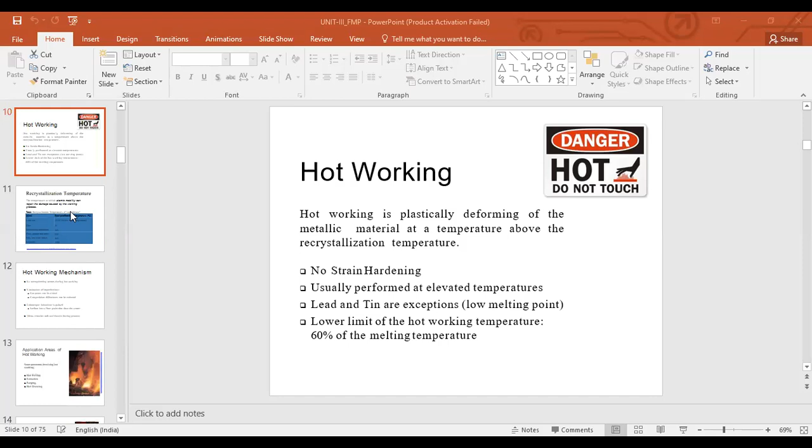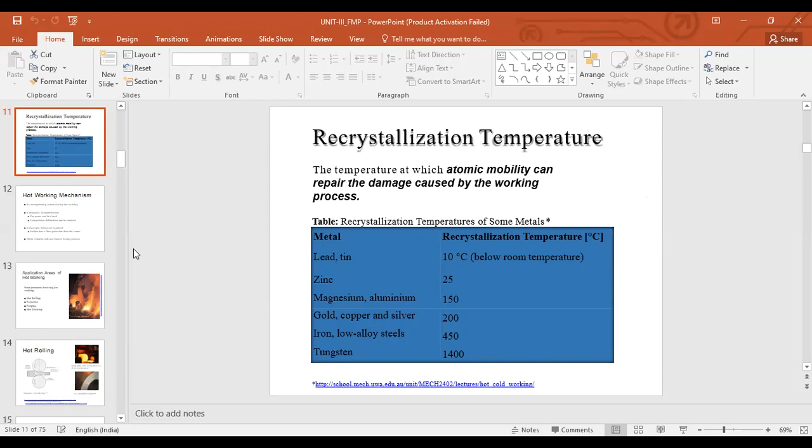And then the different recrystallization temperatures for different metals, tungsten being the highest because it is quite strong, having much strength, and offers more resistance when subjected to loads, and it is quite dense. One reason could be seen as density.

So as you can see, hot working, we looked at that there is no strengthening occurring during hot working because of higher temperature. Elimination of imperfections, gas pores can be closed. So if the temperature is quite high, then there is rearrangement of atoms. So gas pores can be closed, composition differences can be reduced, and even because of the mechanical loads, these gas pores can be closed, because of application of external load.

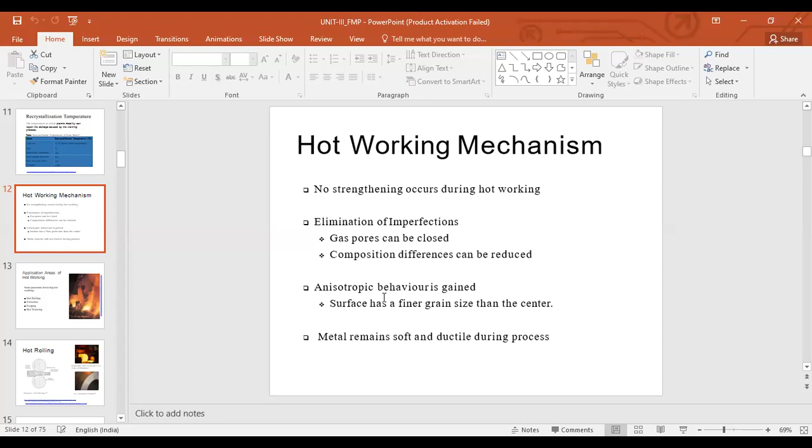Anisotropic behavior is gained because if you are, for example, undergoing hot drawing - depends on the different application areas, hot rolling, extrusion, forging, hot drawing. As for example hot drawing or forging, the grain structure would be changed, even for extrusion and hot rolling as well. So anisotropic in the sense you have elongated grains, the properties would be differing in different directions. That's what anisotropy is. The surface has a fine grain size and the center has a coarse grain size. So that's anisotropic behavior. The metal remains soft and ductile during the process.

So now I want you to have a look at some video, so that...

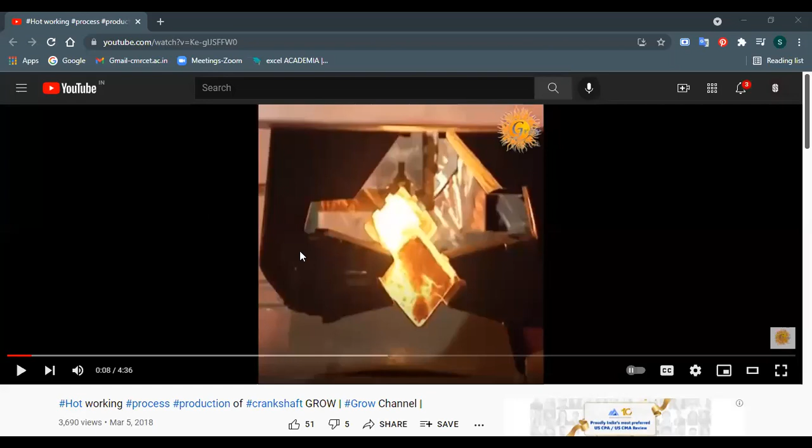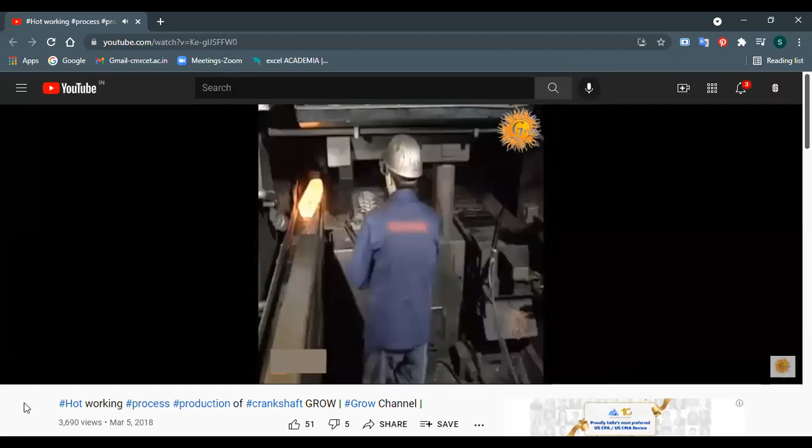This is the process of hot working. There are two kinds of working - one is hot working and second is cold working. You see, they are being pressed while being red hot - that's your recrystallization temperature being achieved.

You separately increase the temperature of this material in a different furnace, etc., and then you bring it to the die. So these dies also have to be resistant - they should be able to bear the temperature that we are working in, and should be able to avoid wear and tear. There should be less wear and tear because they have to be used for long. So all those are kept in mind, keeping the temperature of this metallic material in mind.

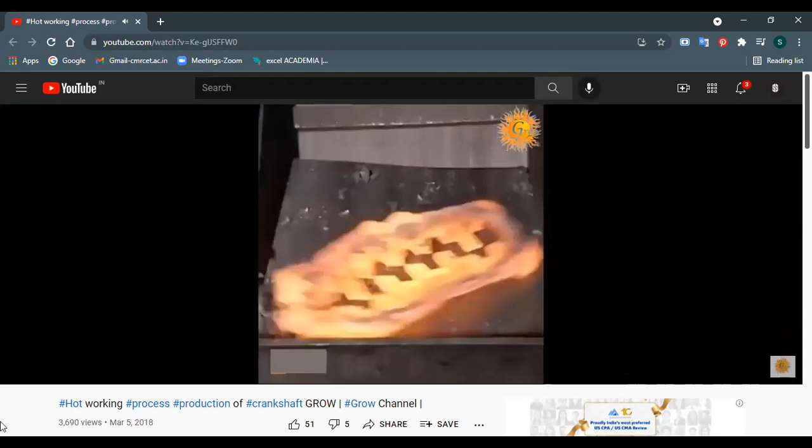The dies would be designed, etc. So this is hot working, right? This is the state that we are working on with the material. The process of the hot working, and in this video you are watching the process of

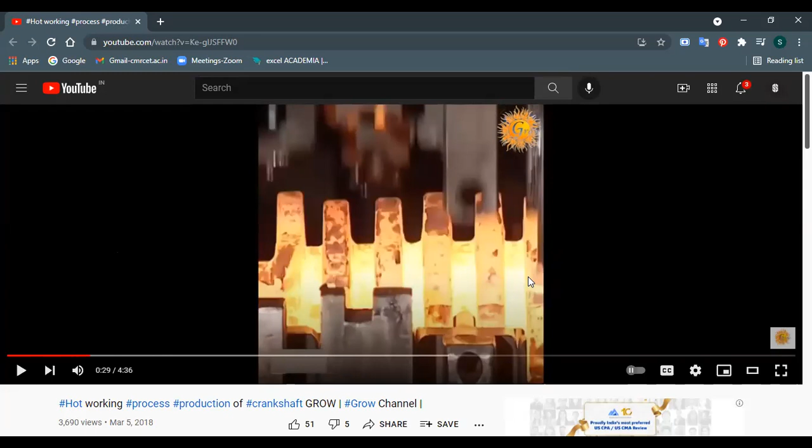That's a crankshaft. If you have observed in automotives, either a two-wheeler or a four-wheeler, you would observe this crankshaft in the engine case. So that's done using this forging method.

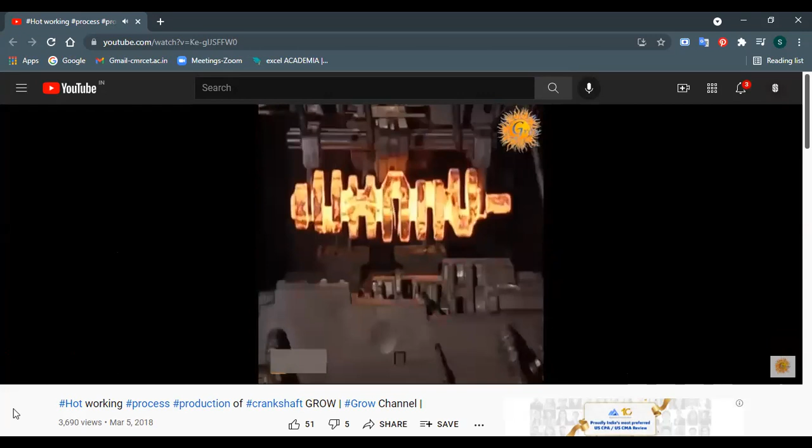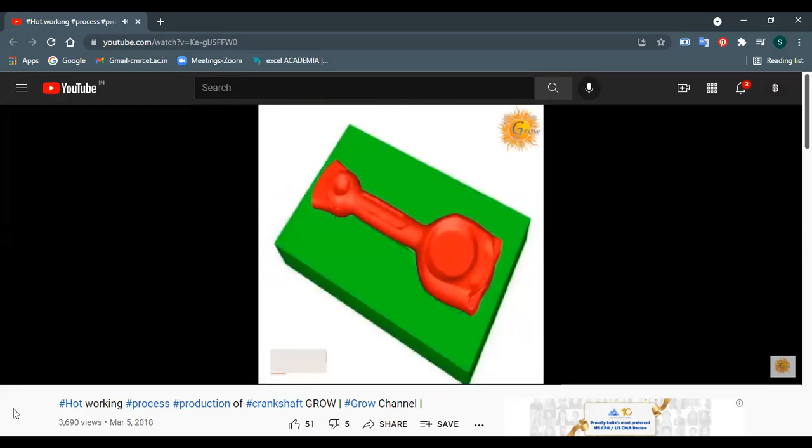The process of the crankshaft making, and the process of making a crankshaft, and this is connecting rod, making of a connecting rod of the crankshaft.

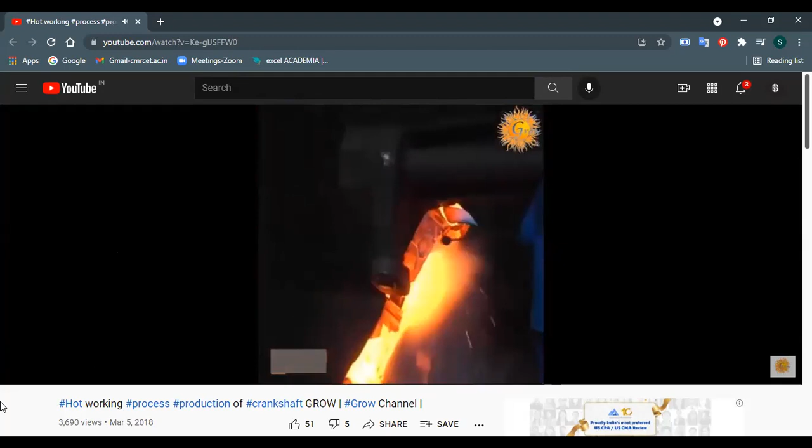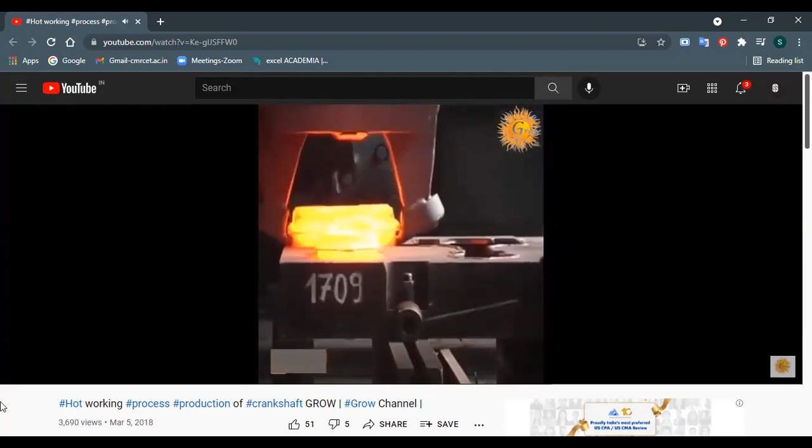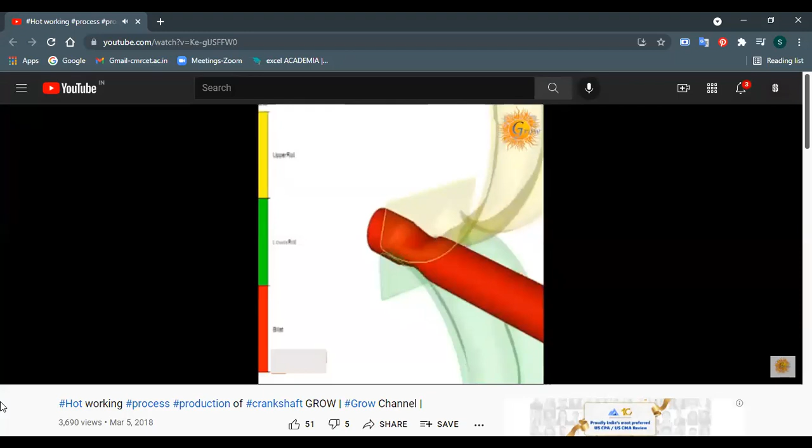CATIA, Creo and SolidWorks, so many kinds of software are used before the design of the crankshaft, and then so many kinds of machines, hydraulic press machines. Now you can see this is the process in which they are pressing and cutting out the required shape from different kinds of machines.

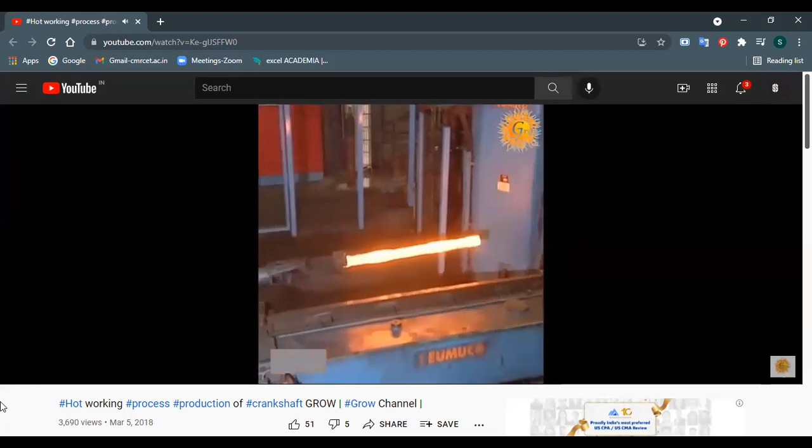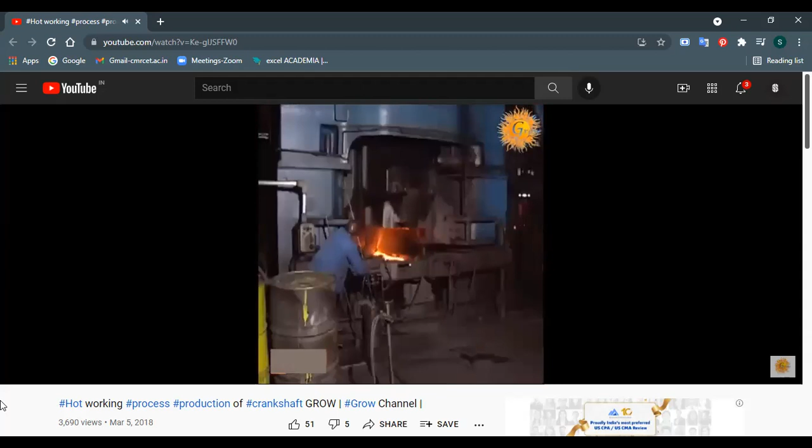And this is the hydraulic press roller. That was rolling process. What you're seeing right now is called a rolling process. Hydraulic press roller, and it's all going step by step for a particular part of the crankshaft.

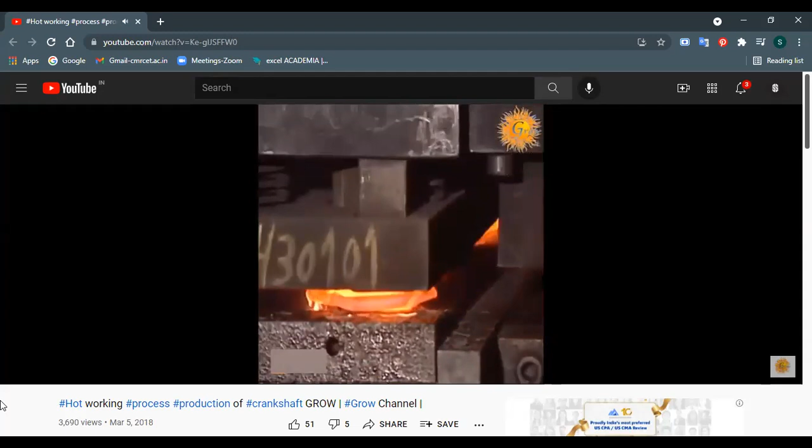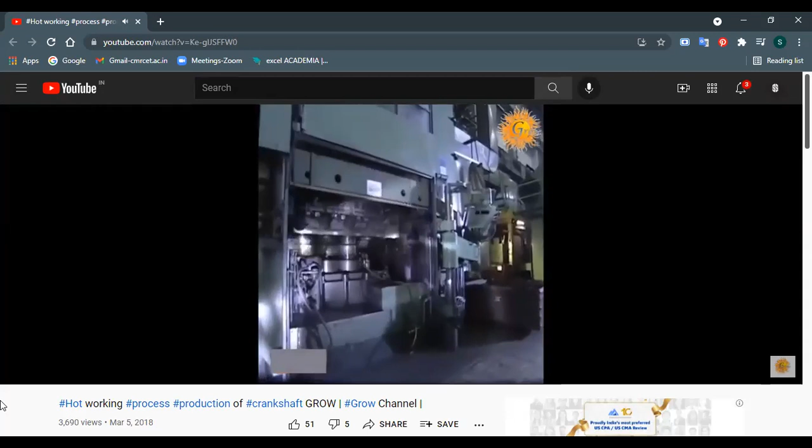From a particular process, you can see this is the hydraulic press. It removes the unwanted material and gives a proper shape. This one is also a hydraulic press. There is a different type of hydraulic press according to the requirement of the work.

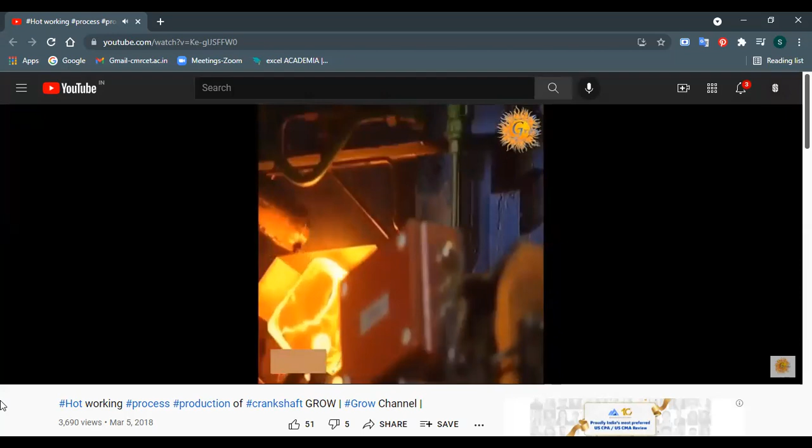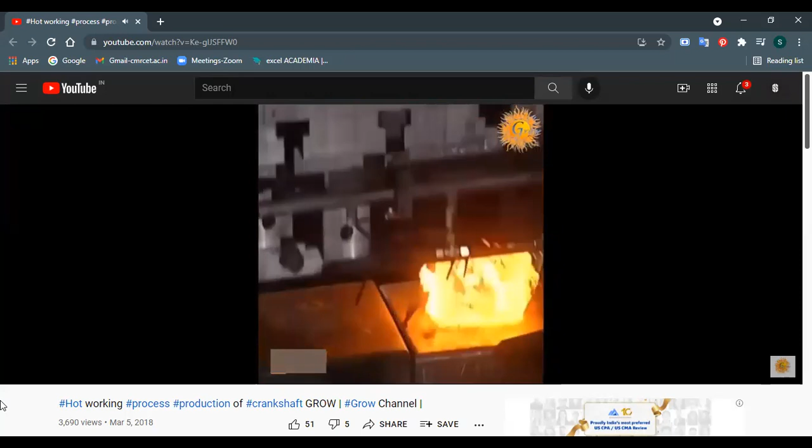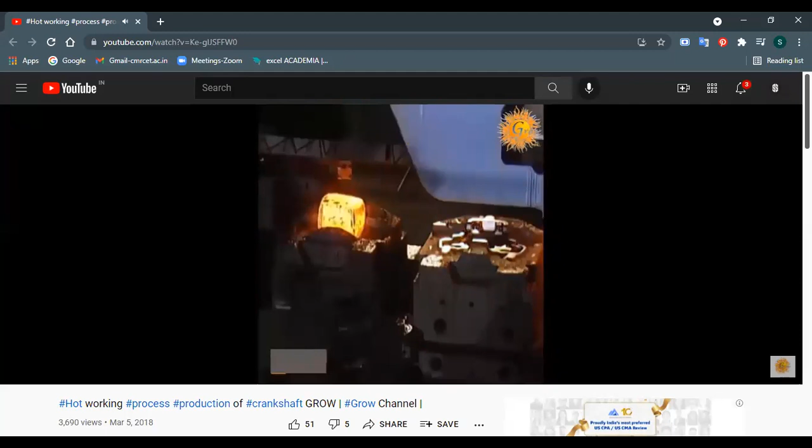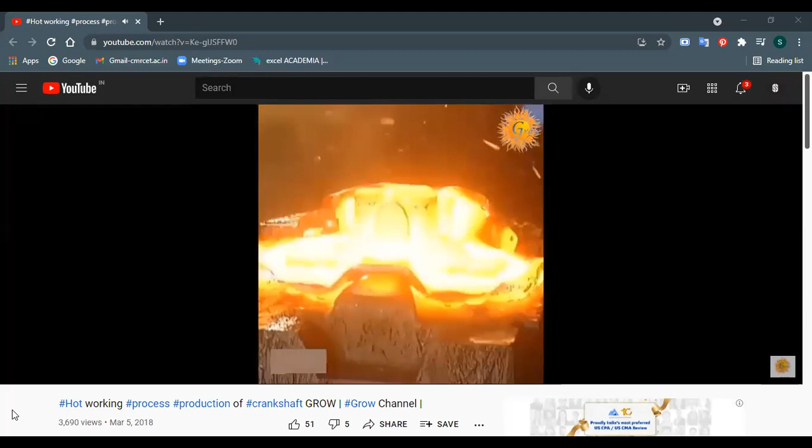The whole process is where the metal is near 500 degrees centigrade or more, but below the melting point, so it's easy to convert the metal into any shape. So it's called hot working, and it's easy to convert a metal into a particular shape.

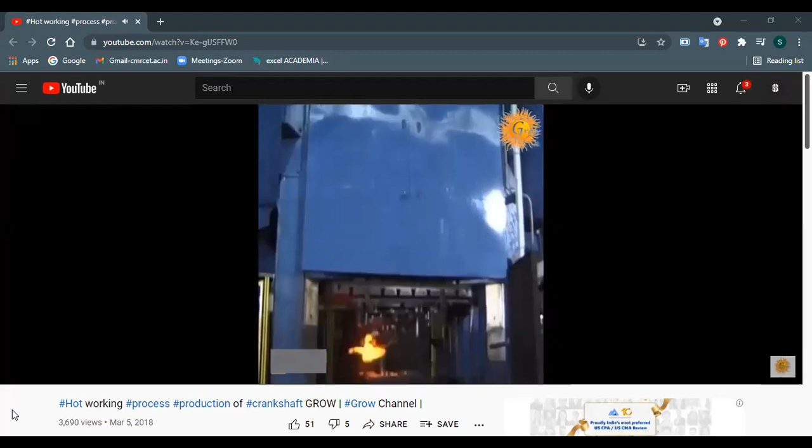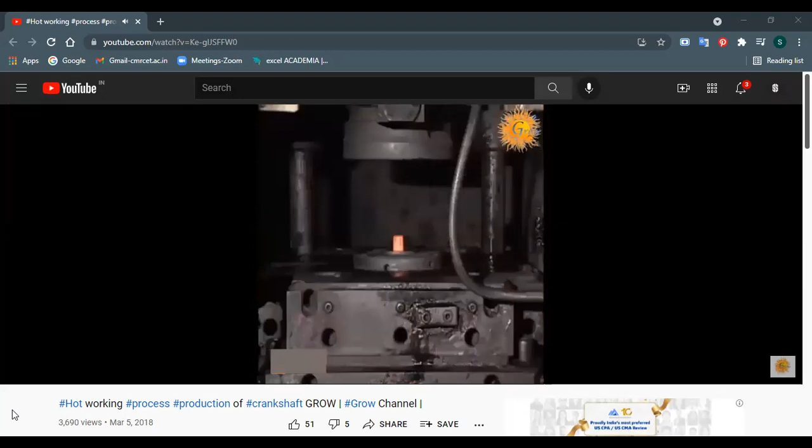So this whole process of making the crankshaft of any four-wheeler engine, every part, after the process of all kinds of presses, and after the hot working, then they go to the storage and finishing work.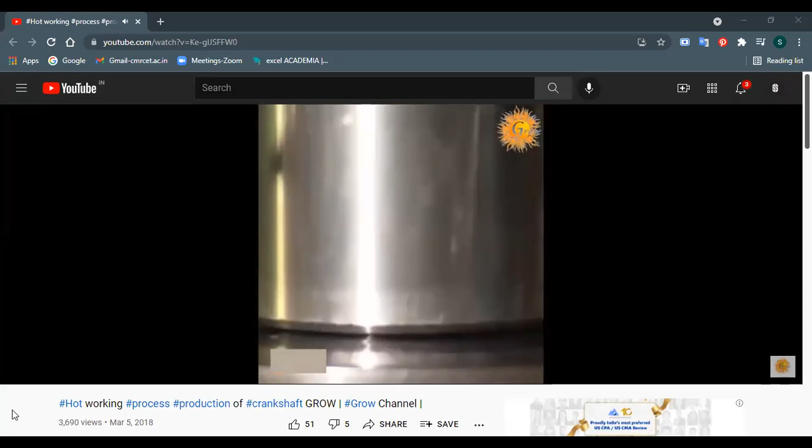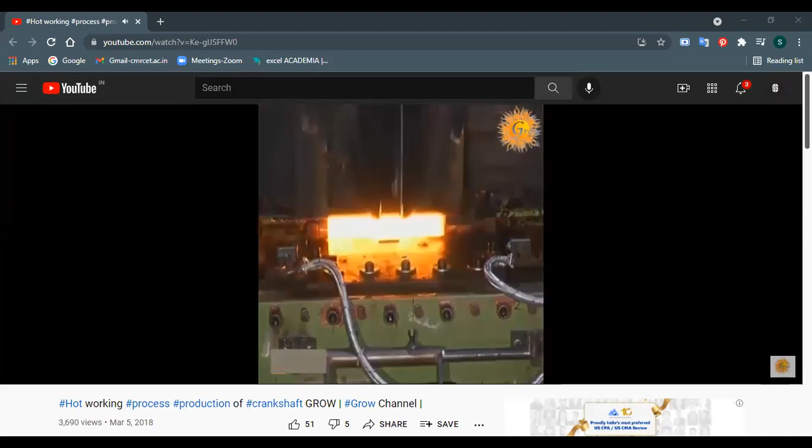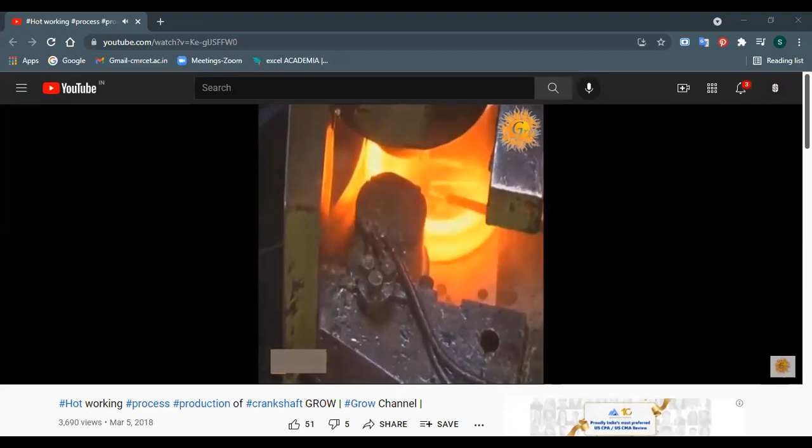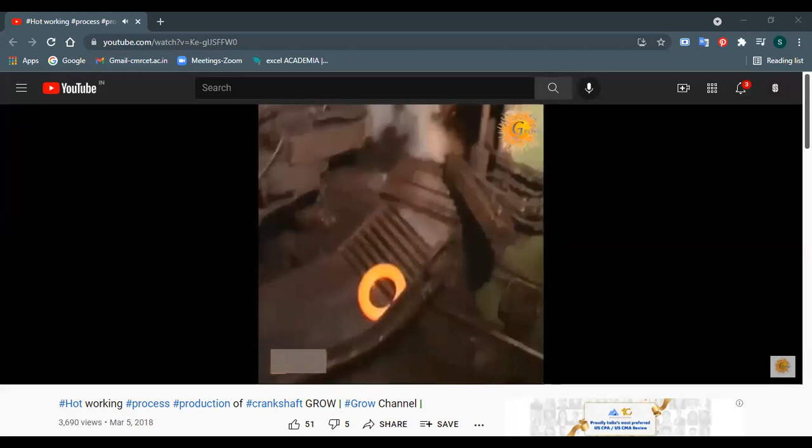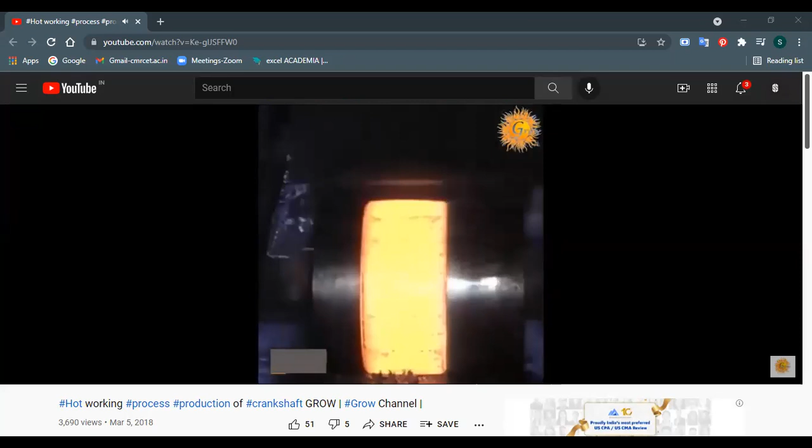In this video, where you're watching, the metal is in a red color, it is very hot, so we can call this all hot working. This is hydraulic pressing the metal with the required force.

This is amazing. Thank you.

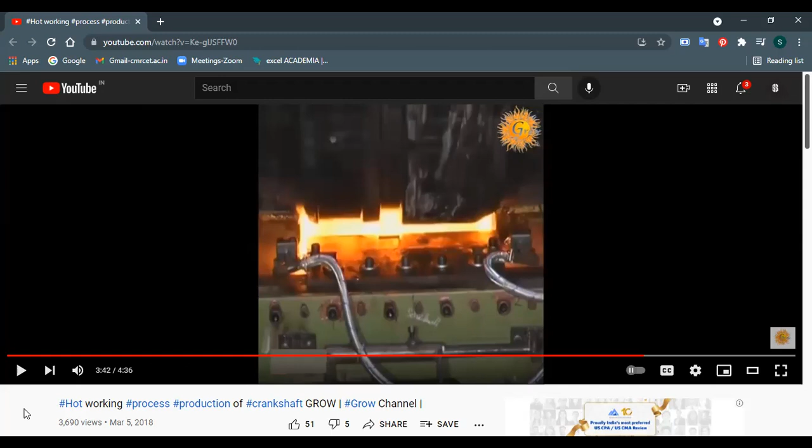Doubts? You see, all those what we have seen, either rolling or forging. I believe we have not seen what we call extrusion here, but even that comes under the hot working process, right?

So there's no strain hardening, as we have discussed. There is no strain hardening, and even the temperature, as we have discussed, is above the recrystallization temperature.

About extrusion, let's see if we can look at it, because this is a separate topic in your 4th unit, but still, since we are now looking at the hot working process, we will...

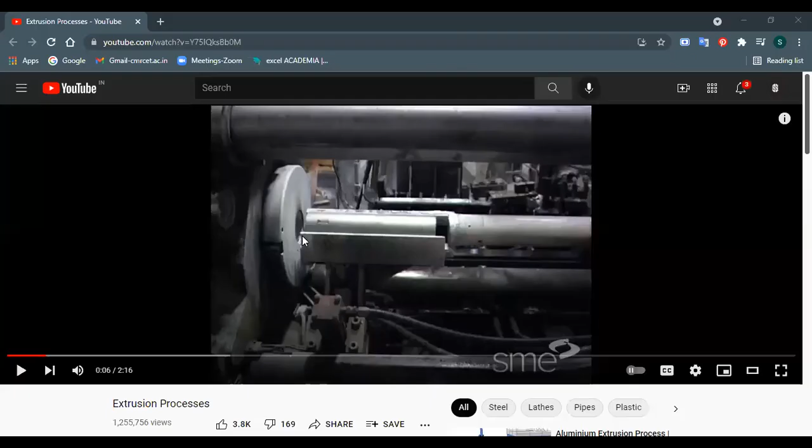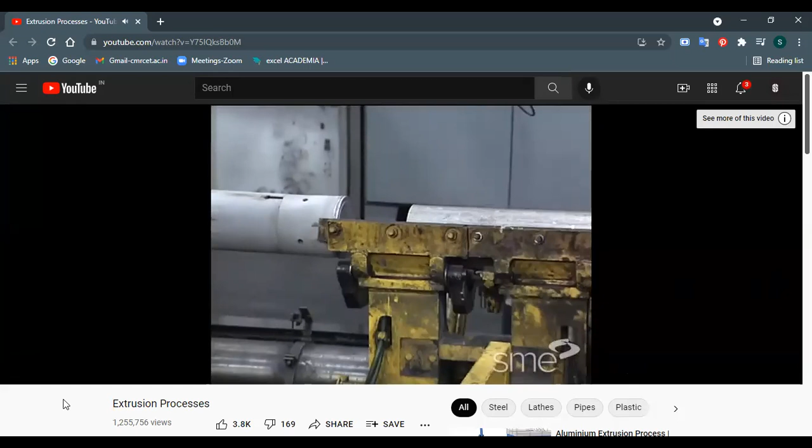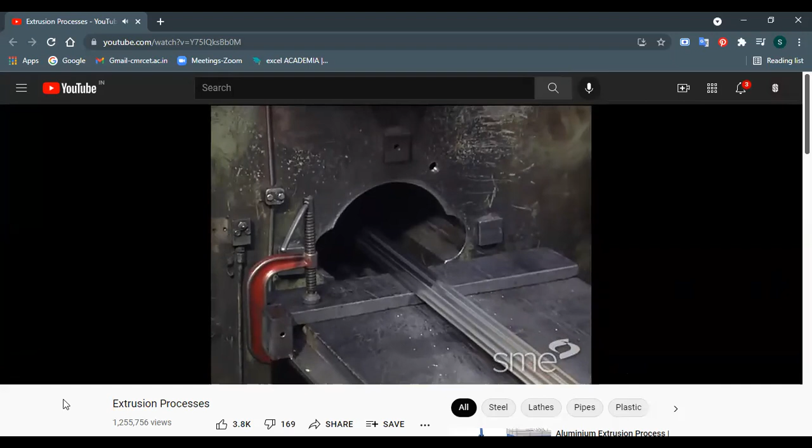The primary type of hot extrusion is direct or forward extrusion. In direct extrusion, the hot billet is loaded into a thick wall container and forced through an extrusion die secured in a holder. The force for extruding is applied by a ram, along with an intermediate reusable dummy block. Metal flow from the die is in the same direction as the forward motion of the ram.

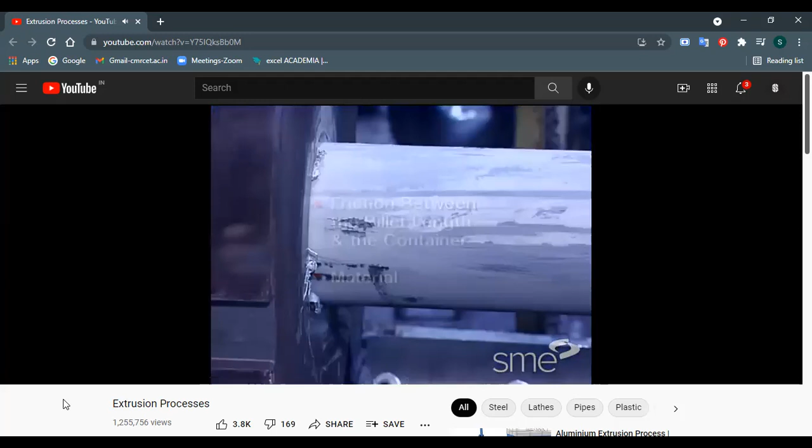Since the surface of the billet length slides along the wall of the container, extrusion force depends on the friction between the billet length and the container material. The friction portion of the force can be reduced by using lubrication. Force increases rapidly as the billet is upset to fill the...

For this flow of metal to happen, you have to have the material at an elevated temperature so that it doesn't have much strength, so that it's able to flow as we want it to. That's where hot working helps us - not just normal temperature, but elevated temperatures we have to be working in.

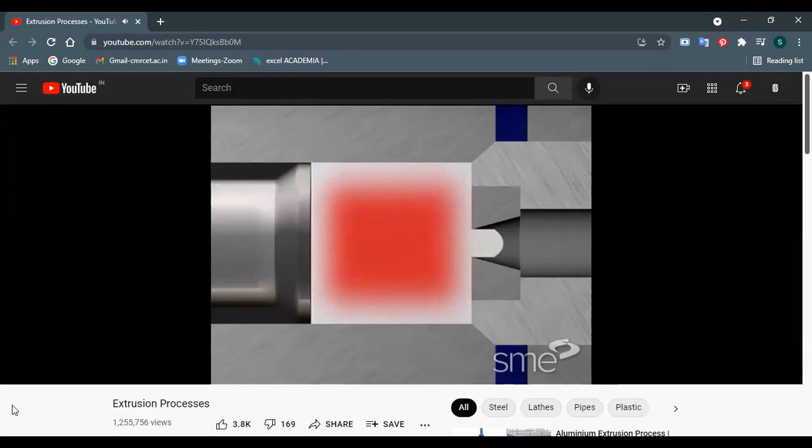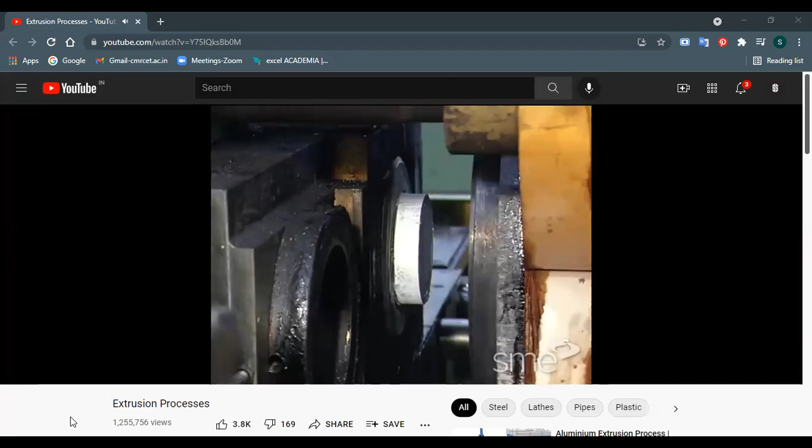Extrusion begins. Upon breakthrough, the force declines as billet length decreases until a minimum force is reached. As the billet thins, the force rapidly rises again to continue metal flow radially toward the die opening. Resistance to deformation increases markedly as the thickness of the butt or unused billet portion decreases.

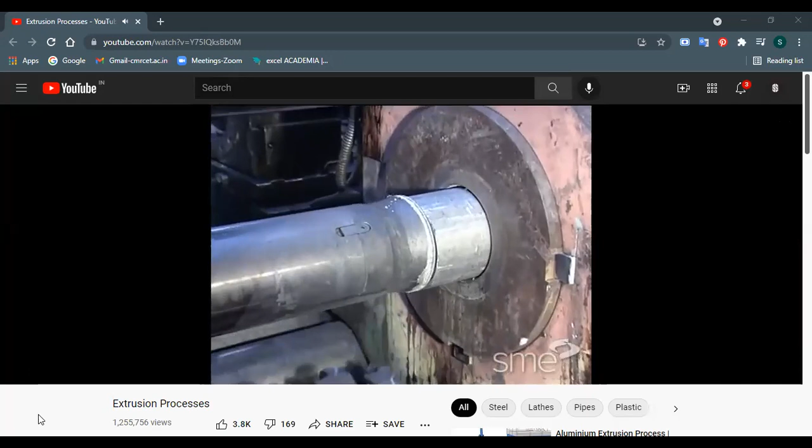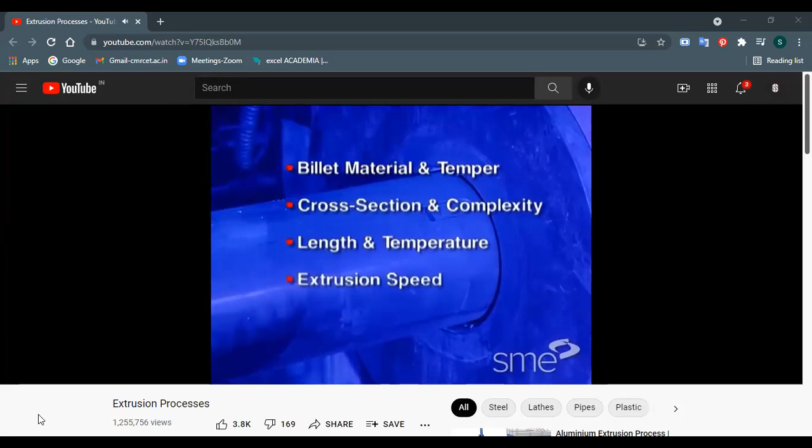Hot extrusion is most commonly performed on horizontal hydraulic presses. These presses are usually rated in force capacity, which translates to the amount of pressure applied to the billet. That pressure depends on billet material and temper, its cross-section and complexity, length and temperature, extrusion speed, and reduction or extrusion ratio. The extrusion ratio equals the cross-sectional area of the container liner divided by the cross-sectional area of the die openings.

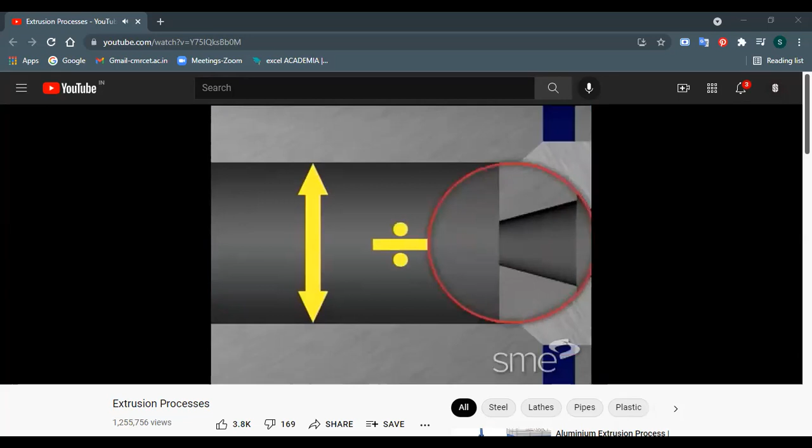Nevertheless, we'll still have a look at the extrusion process when we are looking at the fourth unit. But for now, I want you to understand what is hot working, and I believe that is now clear. As I said, all these processes involve hot work - working above the recrystallization temperature, basically.

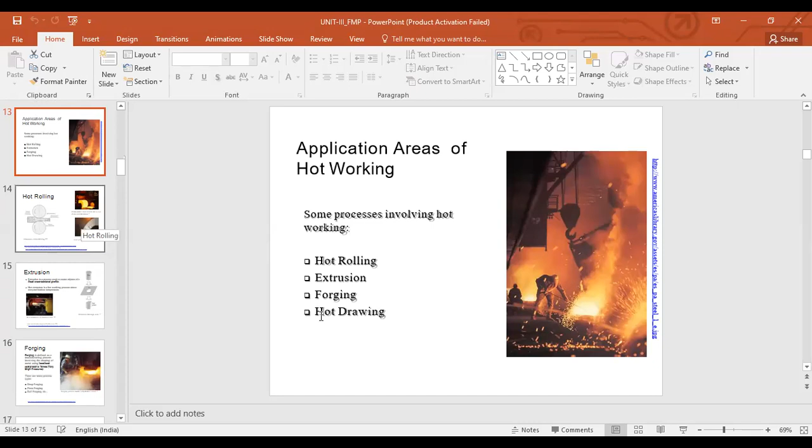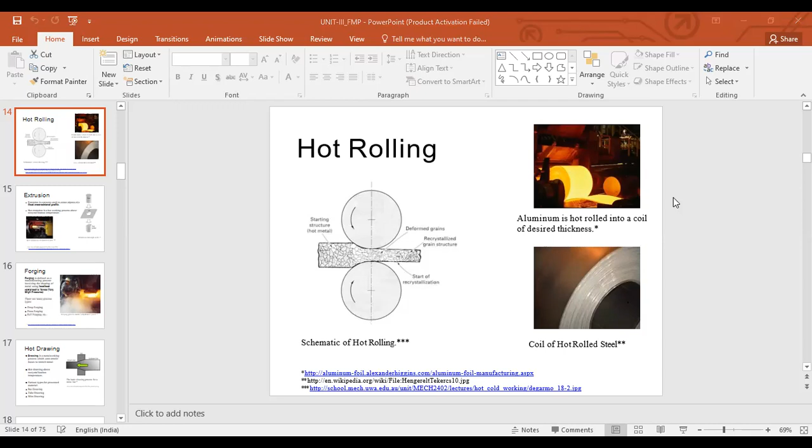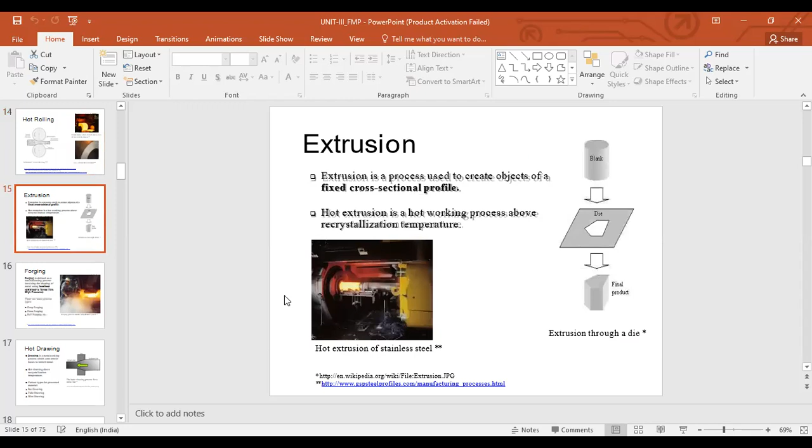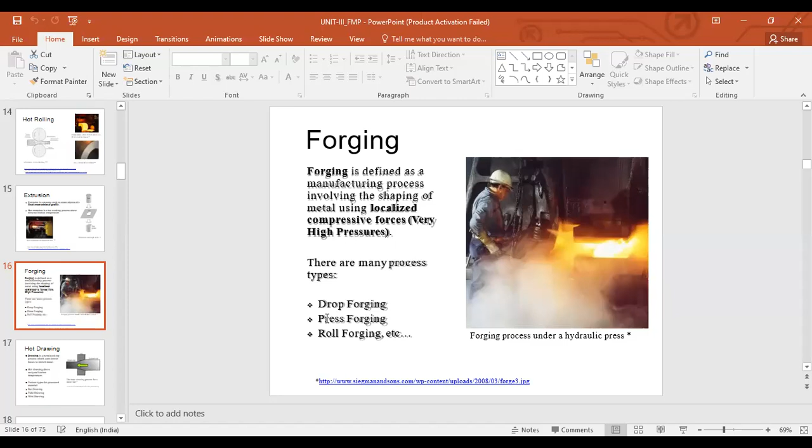So that's hot rolling. And then extrusion we have seen - you force it through a die opening and the blank shape takes the shape of the die. Forging also, in that hot working video we have seen that you apply repeated compressive forces, basically impact forces, especially in drop forging. Press forging has more of a gradual load, generally in roll forging also, if it is done.

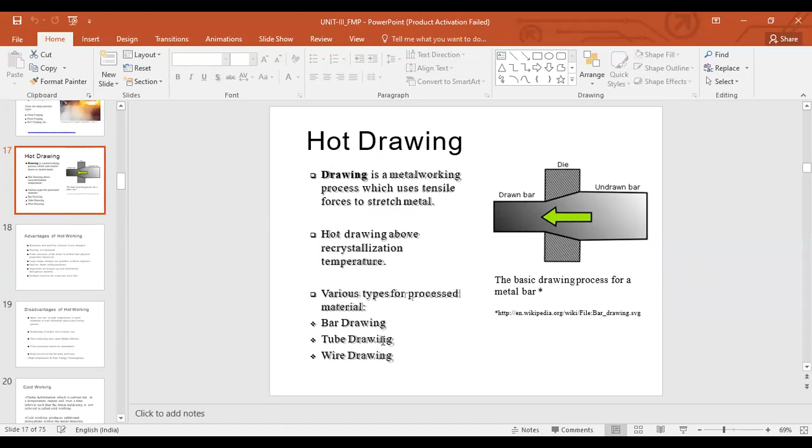And hot drawing - I believe we have seen in the video that you apply a tensile force to one end of the bar, so that the cross section of the bar will change because of the die opening. You have different types: bar drawing, tube drawing, wire drawing. We'll see the different types in detail.

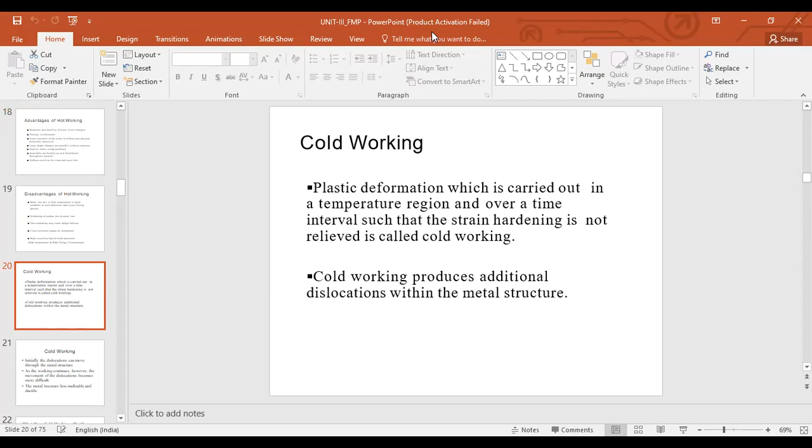But that's hot working. As for cold working, we are working at below recrystallization temperature. So there will be strain hardening - that's the major characteristic. I believe that is clear - hot working and cold working. I could not show you some videos in the last class, but now we have seen them, so we can move on to the next topic.

Now we'll look at sheet metal working. This will encompass all kinds of processes such as stamping, forming - it's a broad domain: blanking, piercing, bending and forming, drawing. I believe drawing is there for wires too, but there is cup drawing as well. Even those kinds - wire drawing, tube drawing, coining, hot and cold spinning. All these are processes that we'll look at in the third unit.

So now let's look at what is sheet metal working. We'll see all of these: the cutting operations, the bending operations - all these are part of sheet metal work. Cutting, bending, drawing, and some other miscellaneous sheet metal forming operations as well. Dies and presses for sheet metal processes - what are the different dies and presses? Sheet metal operations are performed on presses.

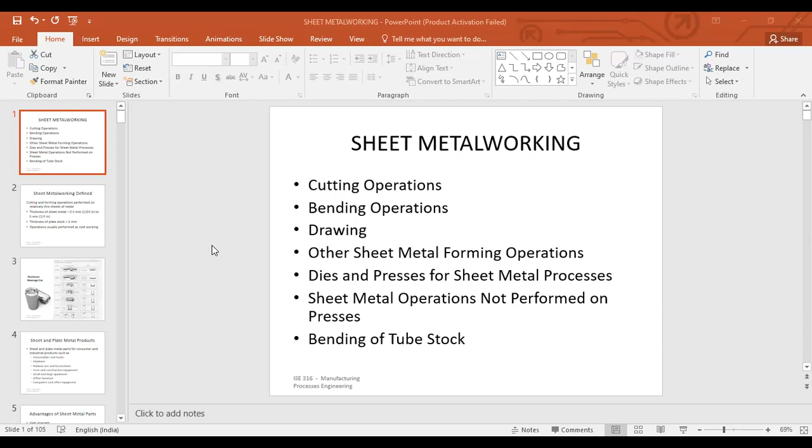If you're not able to perform on presses, then there's other methods to do, like bending of tube stock. Now, as for sheet metal working...

Cutting and forming operations performed on relatively thin sheets of metal. As the name suggests, we have a sheet. Instead of calling it a plate, we call it a sheet because the cross section is significantly less. The third dimension is significantly less than the other two dimensions. Cross section thickness is very less.

So thickness usually varies from 0.4 mm to 6 mm. If you're looking at inches, 1/64 of an inch to 1/4 of an inch. That's generally the working range of sheet metal processes. Thickness varies from so and so.

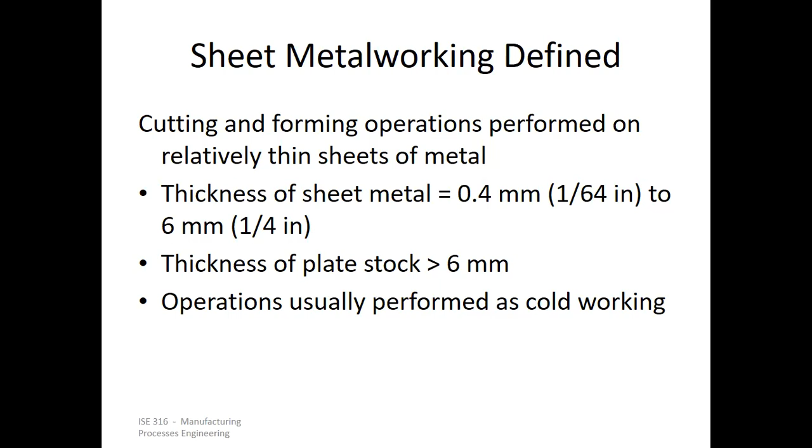Thickness of plate stock greater than 6 mm. Operations are usually performed as cold work. Generally these processes, like piercing, blanking, etc., are performed as cold work and not hot working. So you're working at lower temperatures, and strain hardening, etc., would be present.

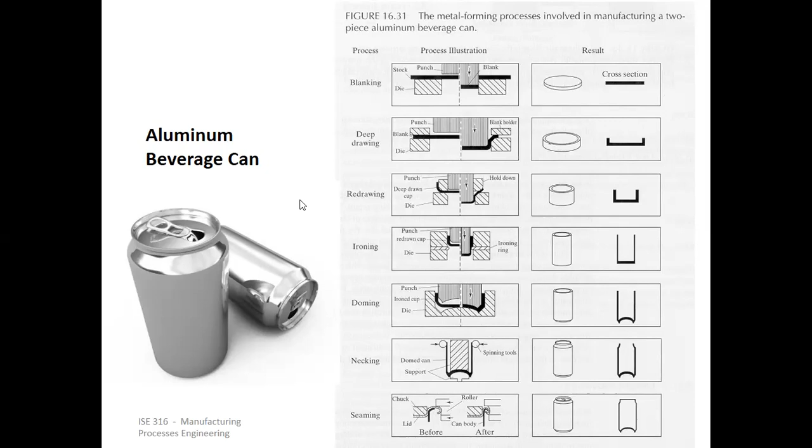As for example, automobiles and trucks. In automobiles, you have the outer car body made of sheet metal. That's called BIW, body in white, basically made up of sheet metal components. Trucks as well, you have a lot of sheet metal components, especially the outer body is made up of sheet metals, as I said. Airplanes, a very important application, the outer frame is made up of these kind of sheet metals.

Railway cars and locomotives as well, the outer profile, the outer body of railways, farm and construction equipment. So there are a lot of applications, as we can see. Small and large appliances I was talking about, consumer appliances, office furniture as well, those trays, etc.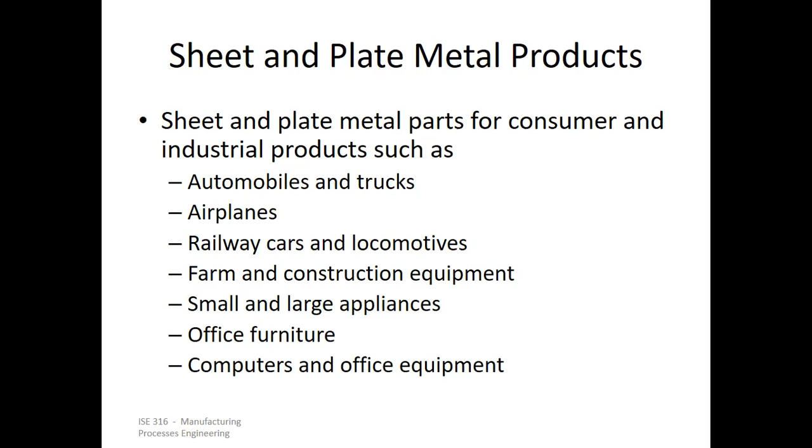So this is why we have to understand how they are formed, how should we form them, what are the different processes that can be performed to get a final product. There are many secondary processes, primary shape forming processes, basically primary shape forming in the sense of rolling, etc. And then the secondary would be to bend it, to shear it, to have some portion removed from it, like piercing would come into the picture. Then hot and cold spinning, basically trying to have a shape. I'm giving you a summarized version of those processes, but that's what we're doing with sheet metals, to create products for all of these applications.